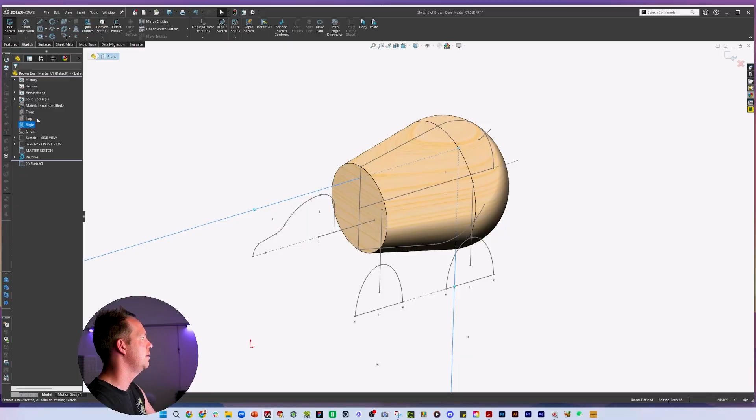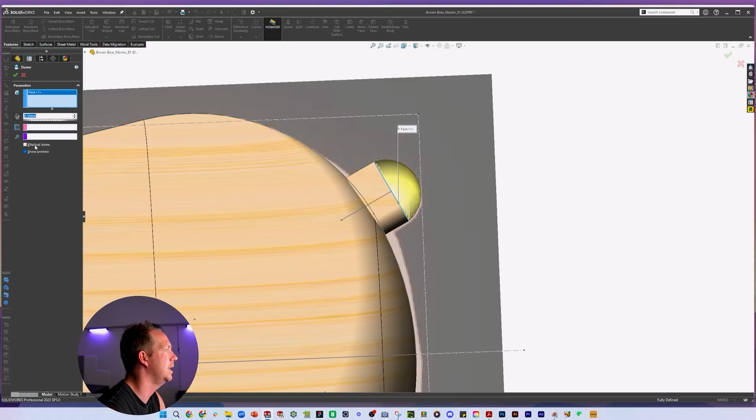In my third week of university, I opened SolidWorks for the very first time. I was studying industrial design, and after 2 weeks of AutoCAD, it was time for our class to move into 3D with SolidWorks. Honestly, it completely changed the way I thought about design. For the first time, every idea I had could exist in 3 dimensions, not just as a sketch, but as something I could build, edit, and refine. That was the moment I realized this wasn't just another subject at uni. It could become the backbone of my entire career.

My first design job post-graduation wasn't even in product design. I started in essentially what was graphic design work. But when I stepped into my first full-time industrial design role, as a junior designer working in point-of-sale retail design, SolidWorks was the key that got me in. It wasn't just helpful, it was essential. The company I joined and the small design team had been using SolidWorks for years, so all of their files, all of their history and data was built on SolidWorks, and so would their projects going forward.

That role set me on the path to becoming a product designer, and SolidWorks was the common thread running through it. When I began building my portfolio, SolidWorks became the engine behind every project I took on. If I wanted to prove I could design, SolidWorks gave me the ability to show it in a way that was professional, precise, and manufacturable most of the time. The businesses I worked with were already using it, which meant I could step in, contribute immediately, and deliver results that spoke for themselves. SolidWorks wasn't just helping me design parts, it was helping me develop real products that built my reputation as a designer.

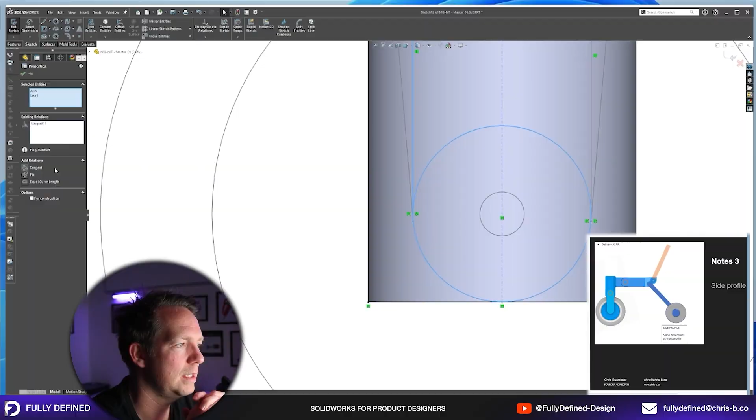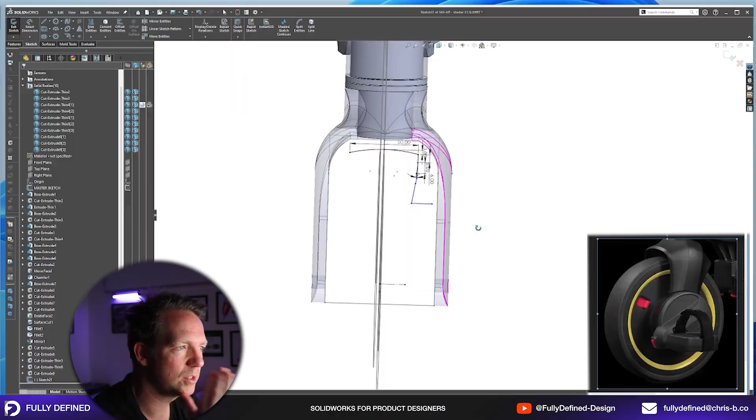That reputation grew as I worked on bigger projects and took on more responsibility. I moved to a small agency and worked as the sole senior designer. In my freelancing, I took on more complicated projects, the Tactica product range, and a series of baby strollers with complicated mechanisms. Each of those freelance opportunities came because I could use SolidWorks quickly and effectively to turn concepts into products that could actually be manufactured. While navigating the path out of point-of-sale design and into product design, it was the freelance opportunities and SolidWorks projects that helped build my portfolio. SolidWorks gave me the confidence to solve problems in real time and to back up creative ideas with solid engineering detail.

Once I'd reached the point of expert with the software and consolidated my DFM knowledge, I was finally successful in obtaining the product design role that I'd always been aiming for. And here's the bigger impact: SolidWorks didn't just make me a better CAD operator, it gave me the confidence to expand into other areas of design. Through projects and certifications, I learned to consider design for manufacture, thinking not just about how a part looks, but how it could be made at scale.

I improved my skills in detailing and documentation, ensuring that my models were accurately translated into drawings that manufacturers could rely on. I grew into project management and supplier engagement, leading discussions with clients, suppliers, and factories, all while having SolidWorks models and drawings at the center of those conversations. That's when I really saw the value of mastering this tool. It wasn't just about making the models, it was about shaping entire projects from idea to production.

As I earned certifications, from certified professional to certified expert, and progressed in project difficulty, that foundation only grew stronger. The process of studying, practicing, and passing each exam built my technical depth, and the credibility those certifications gave me boosted my confidence even further. They pushed me into roles where I wasn't just another designer, but someone colleagues could rely on when the stakes were high. More importantly, certifications became a way of measuring my own growth. Each one marked a stage where I could look back and see how much better I'd become, not just at SolidWorks, but at tackling complex projects with clarity and confidence.

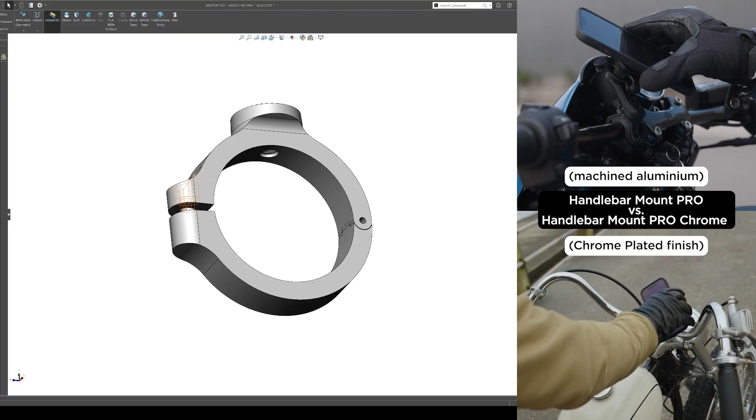SolidWorks gave me the ability to bring ideas to life in a way employers valued, the confidence to expand into DFM, detailing, project management, and supplier engagement, and the credibility to step into bigger opportunities with confidence. If you're on your own design journey, don't underestimate the impact of mastering one tool deeply. For me, that tool was SolidWorks. For you, it could be the same or something else entirely, but that depth of skill can change everything.